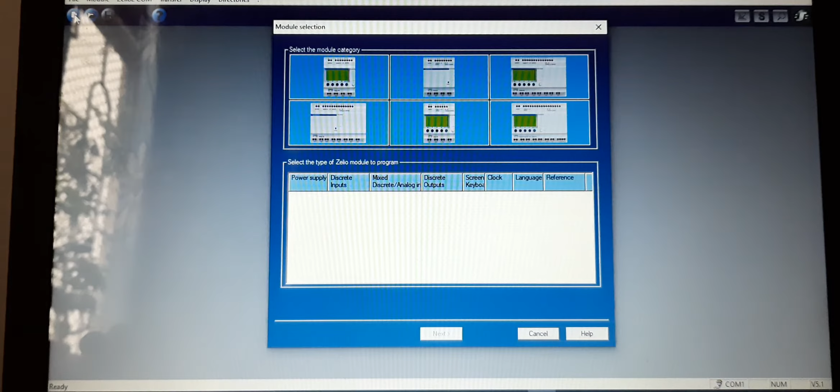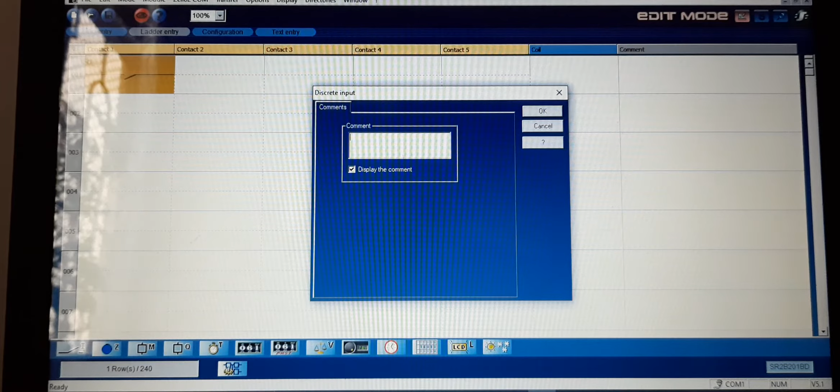So I will say new. So this is a PLC that I am going to choose. That will be SR2B201BD. Say next, next, ladder, next. So here is the blank skeleton. Let us label this as start button. In series, let me take a stop button, normally close type. Stop button.

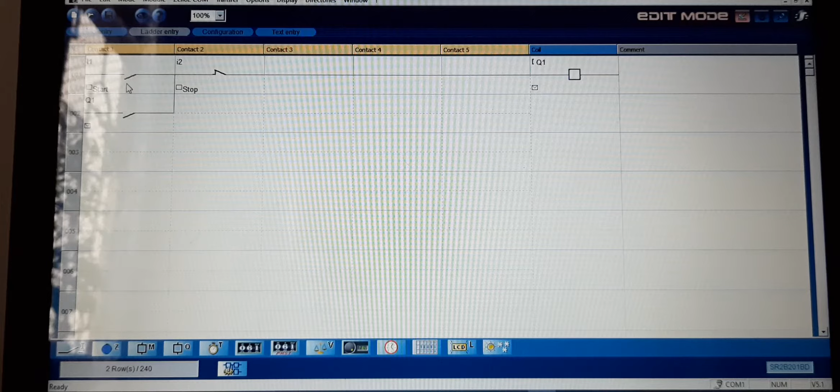Coil for motor 1, latching type. So here is the coil for my motor 1. As always, the retention contact across the start button. Okay. Now the same start button I'll use for my second rung.

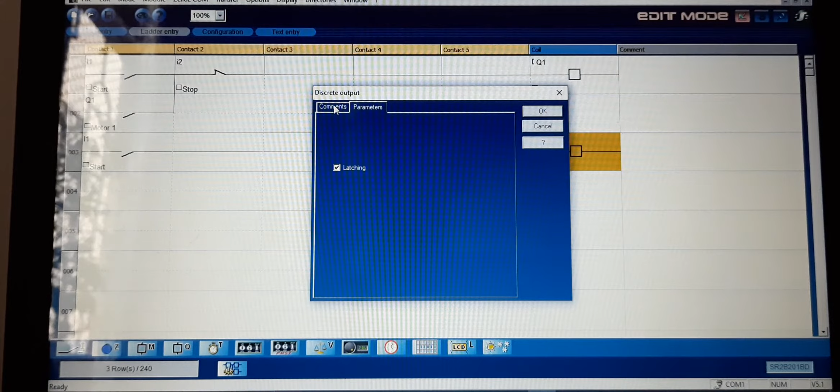Now I need to do some modification over here, which we'll discuss. So here is the coil for motor 2. And as always, the retention contact of motor 2. Some modification will be required to be done over here.

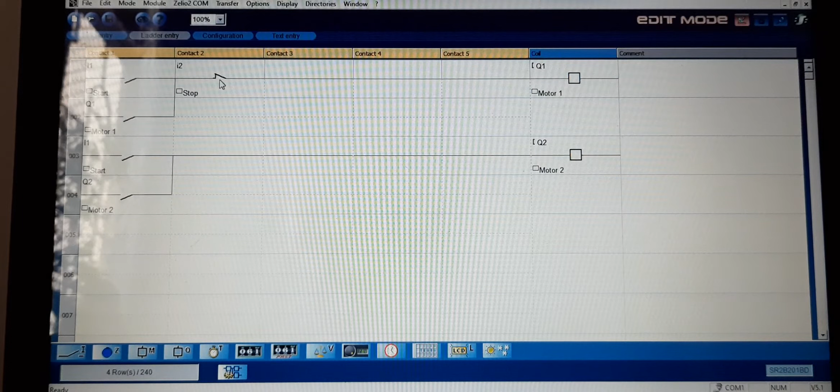Okay. Now my task is that the motor 2 should stop after pressing the stop button after, say, 10 seconds. So let me take this as a clue. So copy and paste over here. This I will keep as normally open, and this should energize my timer. So let me take a timer.

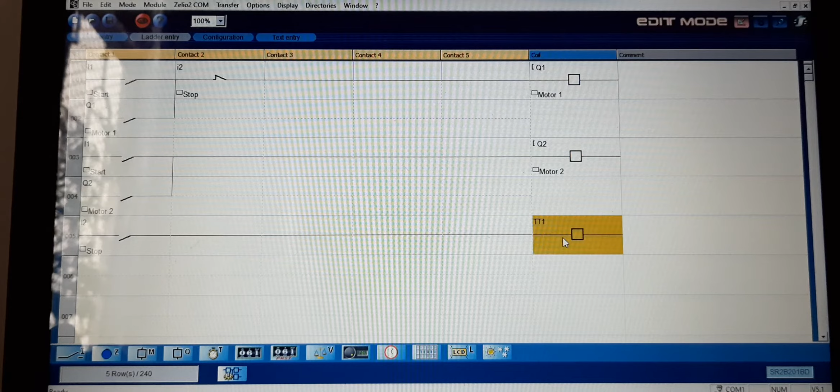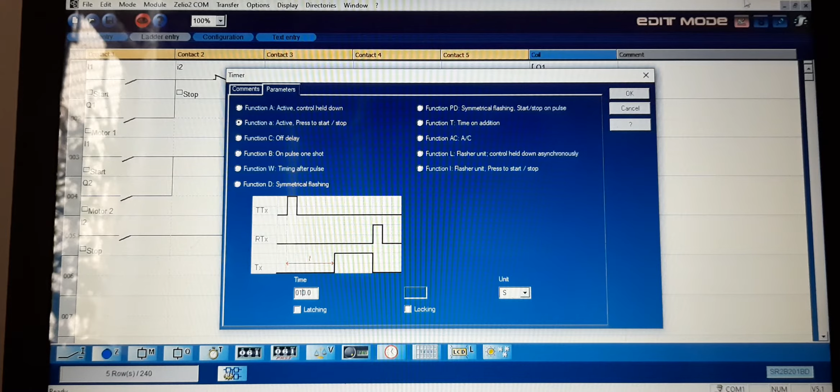I'll choose this type of timer, which is an off delay timer, right? So this will set the timer after a delay of this, and another input I need for resetting the timer. As discussed, my task is to energize the timer after 10 seconds. Okay, so here now what I will do is that of this timer, here I'll place the contact of timer 1, normally close type.

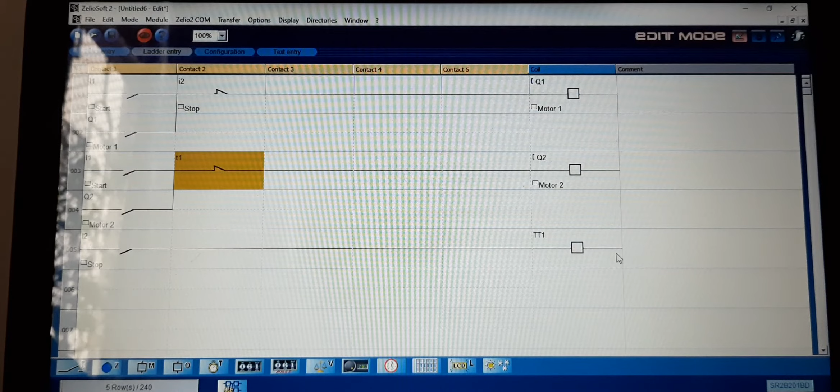Okay, now let us run the simulation. There is going to be some blunder. We'll address the blunder and we'll modify that. So let us simulate the circuit. Let us run the simulation. I press the start button. Both the motors started, absolutely no issue. I release the start button. Because of the retention contact, both the motors are running.

Okay. Now let me take out the binocular, which will tell us about the status of the timer. Now I press the stop button and I release it. So motor 1 has stopped. This timer has kept on increasing. After 10 seconds, first class. As expected, after 10 seconds, this became de-energized and motor 2 stopped.

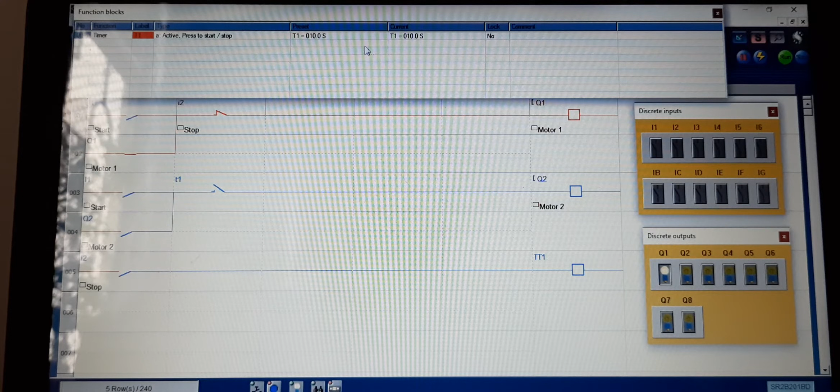Okay. Now let us see what blunder has happened. Now let me run my circuit once again. I press the start button. Motor 1 has started, absolutely no issue. But motor 2 has not started because of this contact becoming open. Why is this open? Because the timer has reached the maximum possible value. Now we will need to reset that. Okay. Now for resetting that, let us see what is the logic to be used.

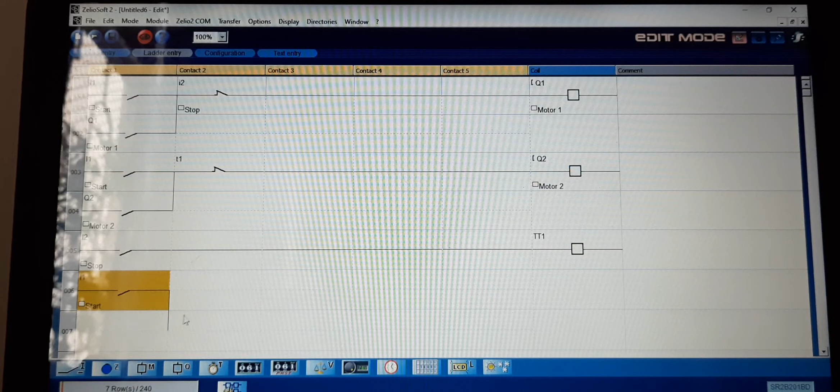So let me stop the simulation. Let me edit the simulation. Okay. Now the logic is going to be like this. I need to start the circuit once again when I press the start button. So let me take this start button, copy and paste over here. Okay, let's see what will happen because of this.

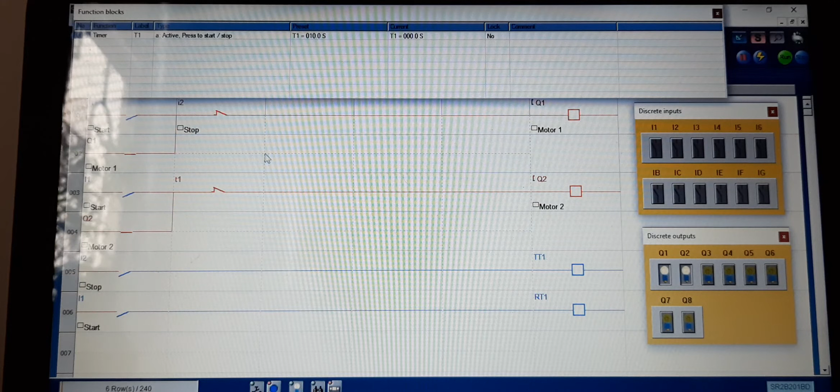So let us simulate the circuit. Again I have got the timer running over here. Okay, so let us simulate the circuit. I press the start button. As expected, both the motors are running absolutely fine, no issue. Now I want to stop the motors, so I press the stop button. Motor 1 has stopped immediately. The timer is increasing, so motor 2 will keep on running for the next 10 seconds.

Great. After 10 seconds, this timer has become open and motor 2 has stopped, and this is still at 10 seconds, right? So therefore, this is not closed. Now, this was the blunder that happened last time. Okay. Now the action is going to be like this. When I want to start both the motors, I'll press this start button. The moment I press this start button, this will momentarily close. That will reset this timer, and the effect will be cited over here.

So I press the start button and release. See, the timer has reset. Okay, now let me run the simulation. So as expected, both the motors are running. Okay, I press the stop button. Motor 1 has stopped. This will keep on incrementing, and this will stop after 10 seconds. Great. After 10 seconds it has stopped, right?

Let me run the simulation once again. Okay, both are running. They will keep on running till the time I press the stop button. Press the stop button. This timer has started incrementing, right? That will de-energize this rung after 10 seconds.

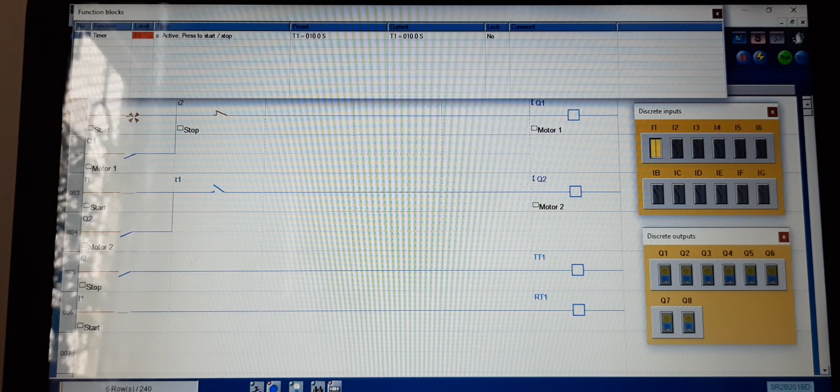This stopped. Okay, again, in order to start the circuit once again, in order to reset this timer, I have to press the start button. See, I press the start button and this timer got reset, and the effect is cited over here. Okay, I hope you have understood and liked the simulation.